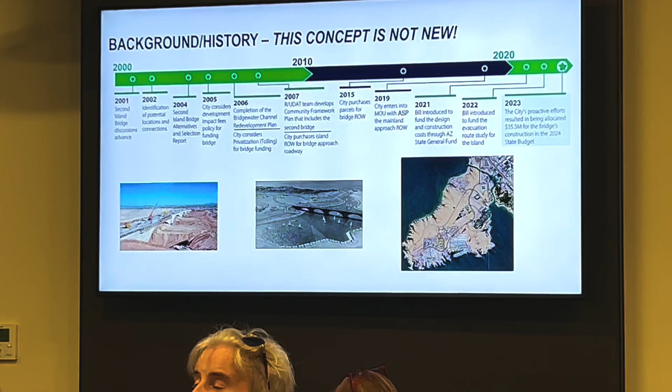The first notch on the timeline says 2001, but I can only squeeze so much on the slide. Actually, the early discussions, as many of you know, go back to the 90s, but really started to get some traction in the early 2000s.

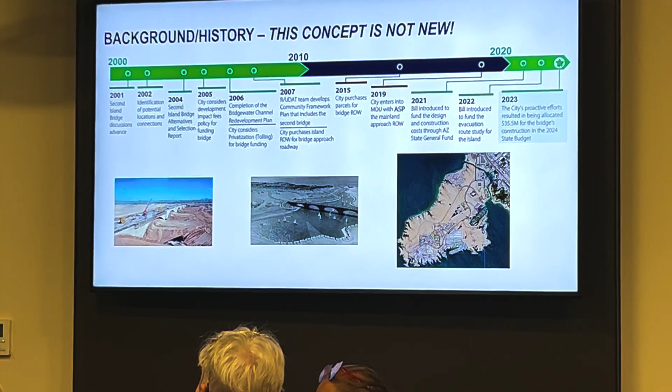There's an actual report or study that was done in 2004. There was a redevelopment plan of Bridgewater Channel in '06. In 2007, the city was very fortuitous and seized an opportunity to collaborate with the Arizona State Land Department to purchase right-of-way on the island side with and through the State Land Department, who manages a large portion of the lands on the island, as I'm sure many of you know.

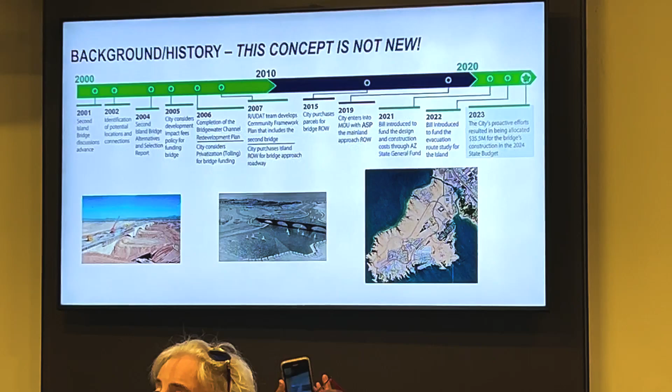And then in 2015, the city purchased some parcels on the mainland side, if you will, immediately adjacent to the Lake Havasu State Park for the would-be connection, and you'll see here momentarily that the preferred roadway alternative utilizes that very right-of-way that was purchased by the city. And then in 2019, there was an MOU, memorandum of understanding, entered into between the city of Lake Havasu and the Arizona State Parks Department for the reservation of potential right-of-way for a future road, which we are now here to bring to fruition.

And then maybe most importantly, Representative Biasiucci led with his colleagues at the state legislature the appropriation of state budget monies for the funding of this project. So you all are very lucky that, unlike a lot of projects, the money is in the bank, to the tune of $35.5 million, okay? We'll talk about that budget. And through that appropriation, the process has commenced. This is kind of the first leg of the journey, as Tony suggested.

This is called a feasibility study at a planning level to evaluate appropriate roadway alignments and bridge alternatives. And the culmination of that feasibility study is this evening, with sharing those results, ranking those alternatives, and recommendation of the preferred alternative for your feedback. Those of you who have been along for the journey, this will look familiar to you. Those who haven't, just a quick little synopsis.

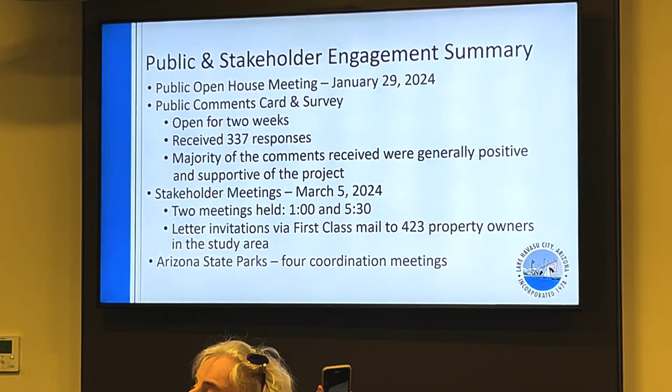There's been a tremendous amount of public input and dialogue. It began with the first public open house meeting on January 29th over at the Aquatic Center, and had a comment card and a survey done online. Tremendous feedback, which we very much appreciate. Like I said, the study in many respects is only as good as the feedback that you give us to help guide us along the way to balance the technical aspects of the study. 337 responses received, which is tremendous, quite frankly, for a community this size. The majority of the comments we received are generally positive and supportive of the project.

We did have 2 stakeholder meetings on March 5th, and we are having a couple more of those tomorrow. 423 property owners who live in the vicinity of this corridor received notification by first-class mail. We held those first meetings on March 5th, and we're going to hold the second round tomorrow in this very room. Last but certainly not least has been our close coordination and collaboration with the Arizona State Parks Department, a very instrumental part of this process. We've had 4 coordination meetings with Mr. Roddy and his staff. We can talk more about that in a little bit if you like.

Real briefly, Tony mentioned Kittelson Associates, along with our traffic engineers. When you undertake a project like this, you want to do traffic modeling to understand what the roadway capacity, i.e. the size of the roadway, needs to be to accommodate growth in the area, but also underscore that this project is rooted in the fact that it's an evacuation route. That is a key point to underscore, but in doing so, you want to make sure the roadways are properly sized. The analysis compared today's traffic versus tomorrow's traffic, simply put, in 2045. A typical planning horizon like this is 20 years.

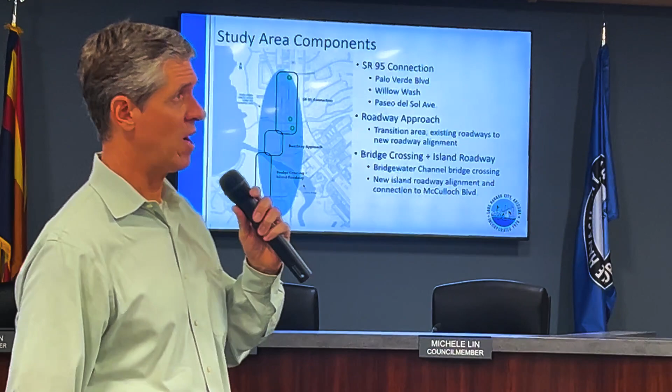This slide will look familiar, and it's not to be redundant, it's just for those who've been along for the ride, to remind you that on January 29th we talked about how we were going to look at this study in basically three components. There was the north component, or a connection potentially to State Route 95, and we evaluated those potential connection points at Palo Verde Boulevard, the Willow Wash alignment, and Paseo del Sol Avenue.

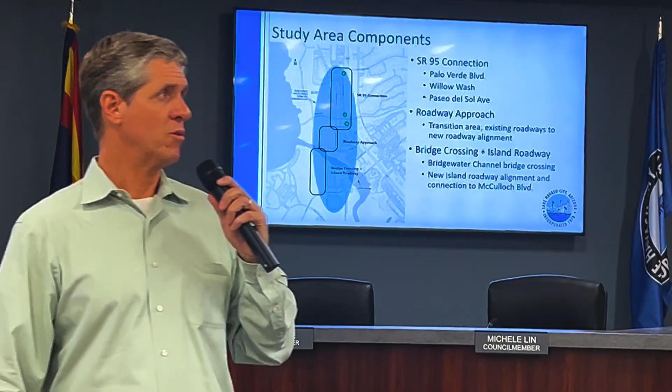The second or middle portion is that roadway approach, or the transition area from London Bridge Road to a brand new road, and the transition that will occur, as you'll see here in just a minute. And then we talked to the bridge crossing and the roadway on the island itself. So from a geographic segment standpoint, we looked at this study in those three different components.

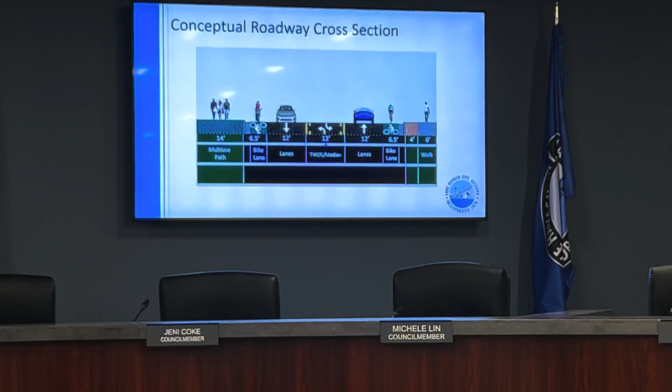Real briefly, if anyone was not at the council meeting on May 14th, this is new information to you. This is the proposed roadway cross section, okay? In just a couple slides, we're gonna look at these roadway alternatives from a bird's eye view, an aerial shot. So I want to orientate you to look at the roadway before we look at the aerial view.

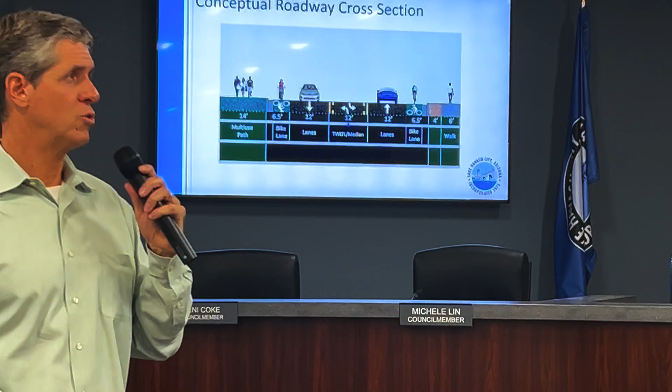This is what the roadway we're proposing would include, and it's a multimodal facility to have, as I mentioned, the two travel lanes and the two-way left turn lane, or median in the middle. That can also be used for emergency purposes, by the way. Two bike lanes on each side, okay? And then on the west side of the roadway, and west is left in this graphic, a 14-foot plus or minus multi-use path that can accommodate pedestrians and or bicycles.

And then on the east side of the roadway, or the right side of the graphic, would be a 4-foot separation from the bike lane with landscaping or other materials, and then a 6-foot sidewalk, okay? So we have all modes of travel accommodated in the prism of the roadway. Altogether, that's about 73 feet plus or minus, with some subtle variations to be determined in the final engineering design, which will be the next stage of the process.

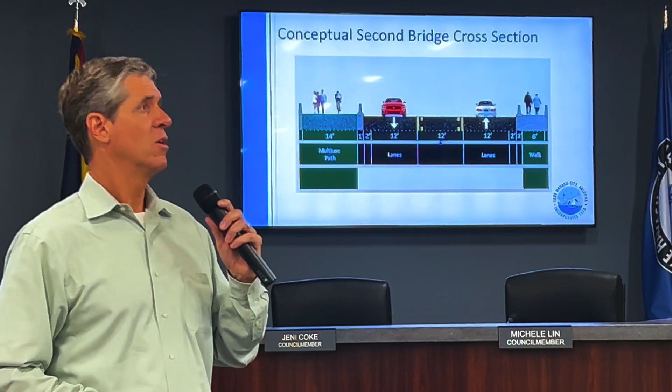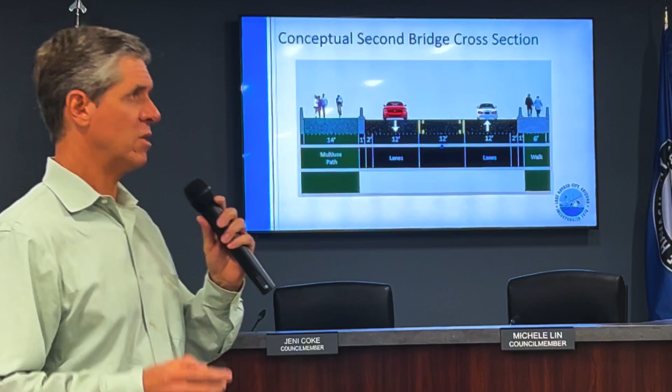So, to orientate you for the bridge itself, a cross-section of the bridge. Basically it captures all the same multimodal features, but kind of necks down like many bridges do, right? The bike lanes are not on the bridge pavement section itself. The bikes are shifted to the multi-use path, but we have two 12-foot travel lanes, the center turn lane and or emergency use purposes, 6-foot sidewalk on the east, and the 14-foot multi-use path on the west.

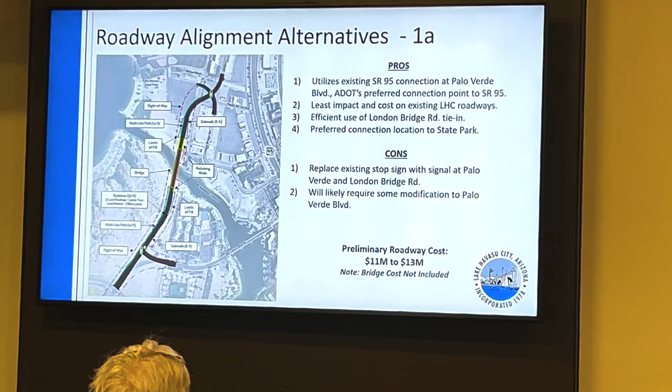So, with that, I'm going to transition to the roadway alternatives themselves. There's a lot on these graphics, and what I want to point out first is to orient you with the line work that is shown. This council chambers has so many TVs, it's wonderful in here, but from wherever your vantage point, I want to orientate you because these lines up and down the roadway are replicated on each of the alternatives, okay?

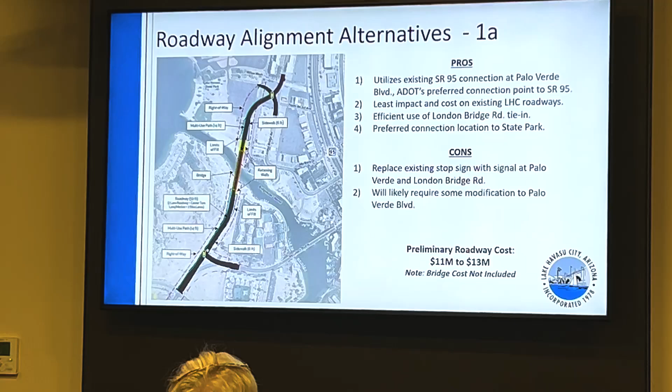What I want to point out is that the dashed magenta or purple-ish line is a right-of-way reservation area. I talked about the right-of-way on the island and the MOU with state parks. That's a 200-foot swath of property, okay? And so that's the extent of the right-of-way reservation area.

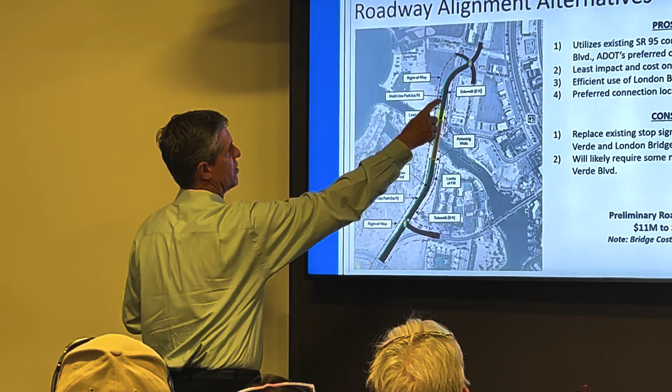Anytime you see bold yellow lines, those will be retaining walls, along with the thinner blue lines that are called out as limits of fill. Those are the areas, if you can envision, where the roadway before and after the approach will be at existing grade, then the roadway is going to start to elevate, okay?

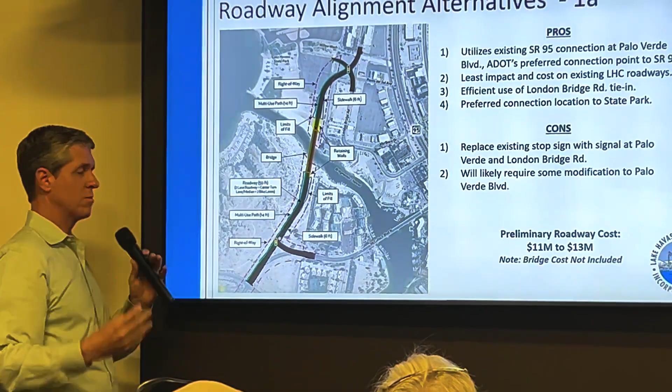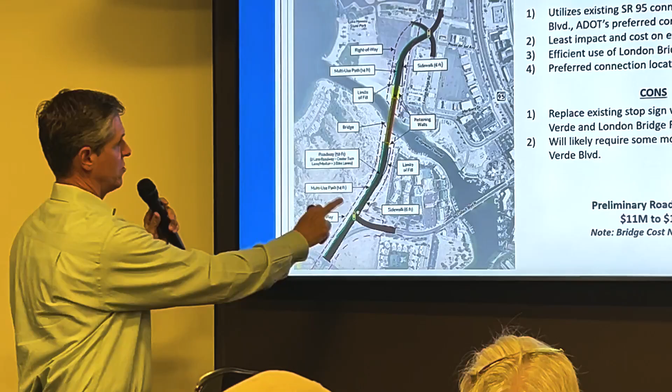So that area where you see limits of fill is fill dirt to begin to elevate the elevation of the road to then get to the level of the bridge that needs to clear the channel, okay? So the retaining walls are there to help maintain or hold, for lack of a better term, the dirt in the elevated condition. The bridge section itself is in the orange line work, and then the multi-use path that you saw in that cross section is in the bold green. And then you'll see the traffic signal icons accordingly.

So we have a series of 5 roadway alternatives, and within each alternative, there's an A and a B. Okay, the A alternative is always the alternative that has traditional signalized intersections. And then when we get to the B alternative, I'll just go back and forth. The B of the same version, 1B, has a roundabout alternative as opposed to a traditional signalized intersection.

Okay? So, real briefly, because I'm going to kind of go through these quickly on the roadway alternatives, and then my colleague who's joining us virtually, John Emmenheiser, is going to go through the bridge slides, and then I'm going to come back and dial in on the preferred alternative, okay? But I want to walk you through these alternatives briefly.

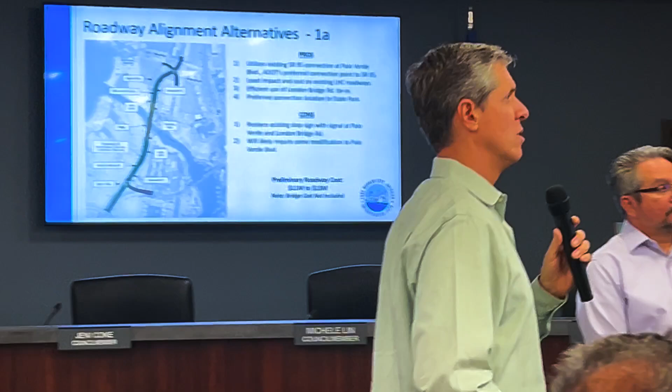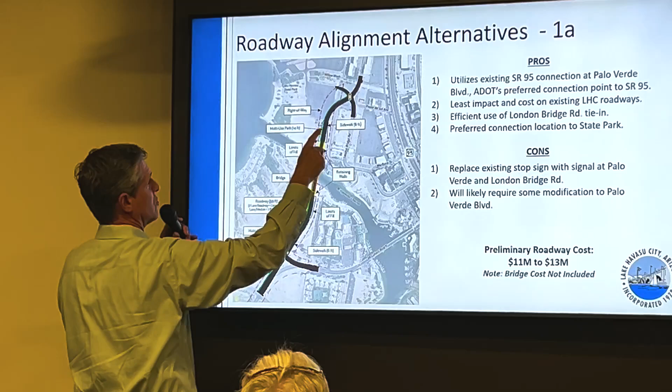1A, as you can see, you can see some of the pros and cons there, but this ties in right into London Bridge Road. And on this graphic, in case you're having a difficult time orientating yourself, London Bridge Road is right here. Okay, so the roadway will come in and then transition through the city-owned, it's that parking lot, which is city-owned property.

The transition onto State Parks property, where the existing MOU contemplates this roadway for many years now, and is shown in that, again, that 200-foot swath. You can see how the roadway is a portion of that 200-foot swath. Comes straight down, crosses the channel in this fashion, and it connects to the existing right-of-way that's already in place, okay, on the island side.

So from generating alternatives and looking at different alternatives, I want to really underscore the fact that there's existing right-of-way in place on the island, and there's an MOU, Memorandum of Understanding, for the reservation of right-of-way through the state park. So those are variables that exist today that we as the design and planning team are known variables that we are staying within, okay? And that was a primary objective of all the partners as we move forward, so I wanted to underscore that.

With this particular alternative, I'm spending a little more time on this one than the others to acquaint you. The others will be a little faster, but this utilizes a connection at Palo Verde Boulevard, which is, of course, to the north, which is, by the way, ADOT's preferred connection point to State Route 95. So, as you can imagine, connecting a new roadway to an ADOT-owned and operated facility is going to require coordination and approval from ADOT. Formal approvals will be done in the upcoming engineering design stage, but of course we've had preliminary discussions to get their feedback. Okay, so ADOT's preferred location is at Palo Verde.

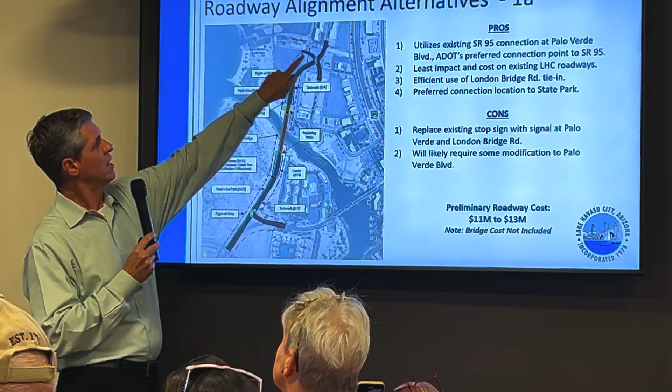They had identified that they would prefer to have a connection point, and it will be a full-time permanent, I want to say year-round, Dan, I'm sorry if I misspoke on that, but a full-time access, or at least the potential thereof, at the north end, as this is demonstrated here, the north end of their existing edge of the parking lot, okay? So that's another important project partner variable that's been factored into the design. So this particular alternative achieves that objective as well.

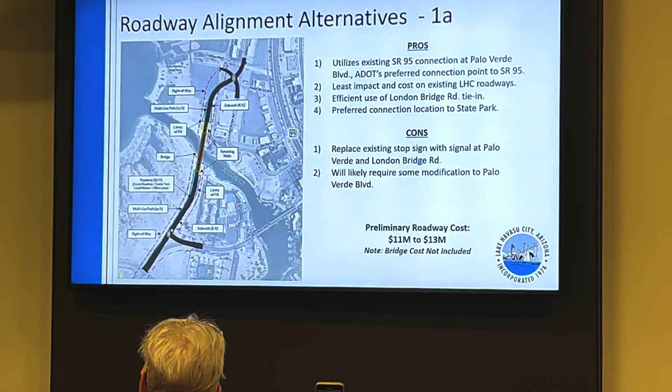A couple cons associated with it is to replace the stop sign at Palo Verde and London Bridge Road with a signal, and then it will require some subtle modification to Palo Verde Boulevard as well. Last but not least, you see in the lower portion of the slide, we show a lot of costs associated with each alternative. The preliminary cost estimate on this roadway, again, does not include the bridge, is at $11 to $13 million for this particular segment. Okay. So now I'm going to kind of move through these a little bit faster because I did some orientation with the line work and everything else.

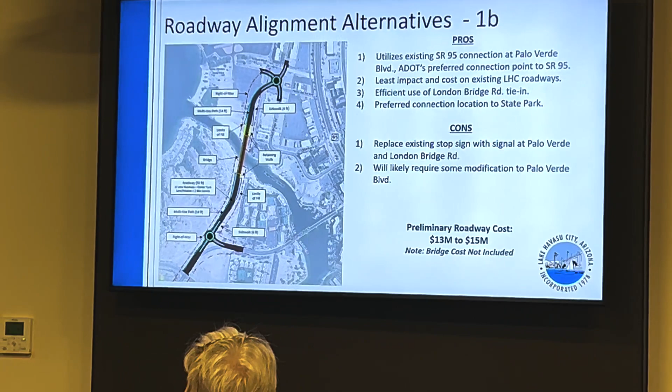So 1B, same exact option or alternative as 1A, except with the roundabout options. The only difference you can see is in the cost estimate. Roundabouts cost a little more on the front end to design and construct. However, they're cheaper to own and maintain in the long term. So a little bit more cost on the 1B version of 1.

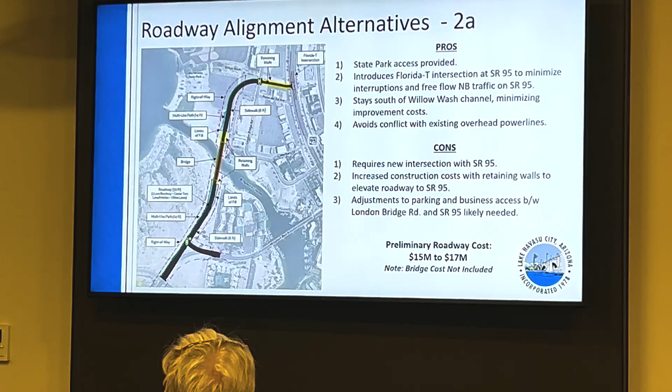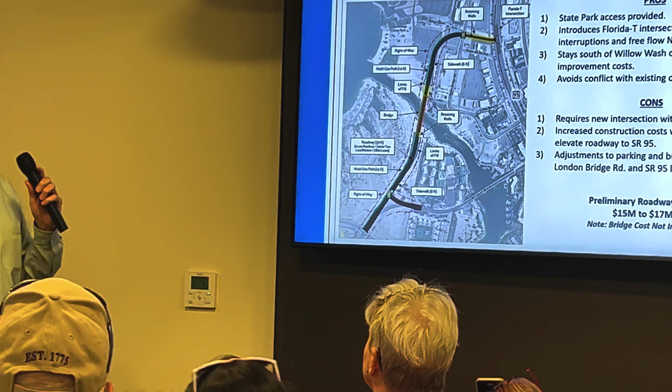So quickly on alternative number 2, 2A, the roadway has a lot of the same characteristics as 1A and 1B, and you'll see, folks, throughout these options that particularly on the island side, a lot's not going to change. That right-of-way is in place, those known variables are there. The only thing that changes with 2A is how this particular alternative turns at a 90-degree angle as it leaves the state park. It goes due west, if you will, east, on the south side, straddling the south end of Willow Wash with a proposed connection point with State Route 95.

So remember we talked about the yellow, meaning the retaining walls? You can see a lot of yellow there, which translates to more dollar signs for retaining walls to raise the roadway, cross Veterans Way, and connect with State Route 95. So that's how that option's a little bit different. Certainly, it provides access to the state park, but not at its preferred location.

It connects to State Route 95. It minimizes improvement costs or utility conflicts along the south side of Willow Wash. However, it does disrupt business access on Veterans Way. So that's one of the Achilles heels, if you will, or negatives of this particular alternative.

Hey Kevin, can I ask a question? Can you, I'm going to go through this and then I'll take questions if you can.

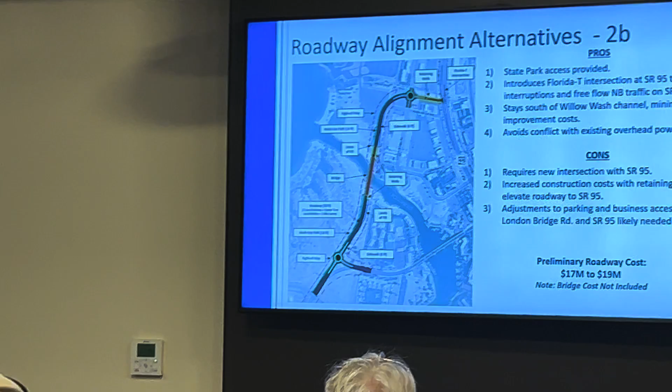Thank you, sir. 2B, again, same exact alternative. We're just replacing the signal at London Bridge, the proposed intersection of London Bridge Road and this new road, and then down on the island at the McCulloch intersection. So 2 roundabouts instead of 2 signals. Pretty much everything else is the same.

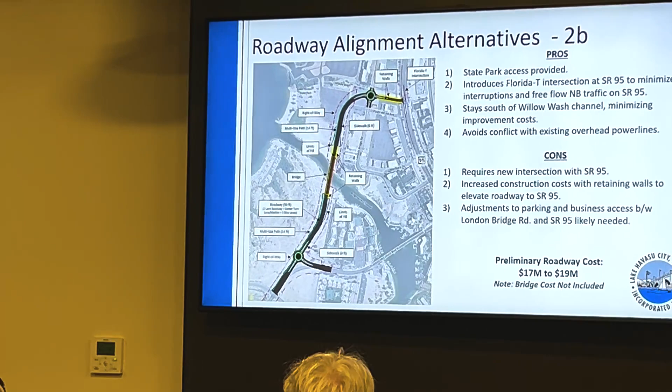You can see the cost went up. I was remiss in not pointing out on 2A, 15 to 17 million for this roadway. With the roundabouts, 17 to 19 million. So just a scooch more expensive than alternative number 1.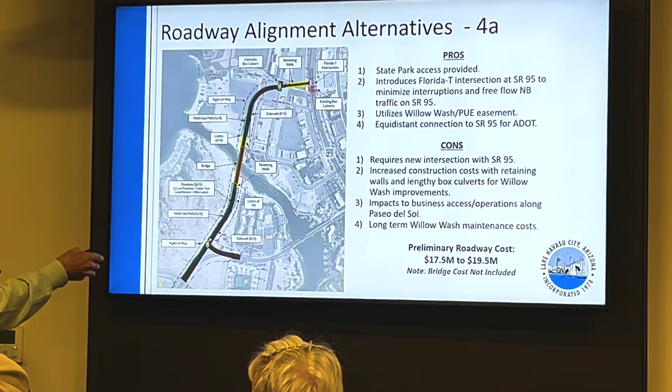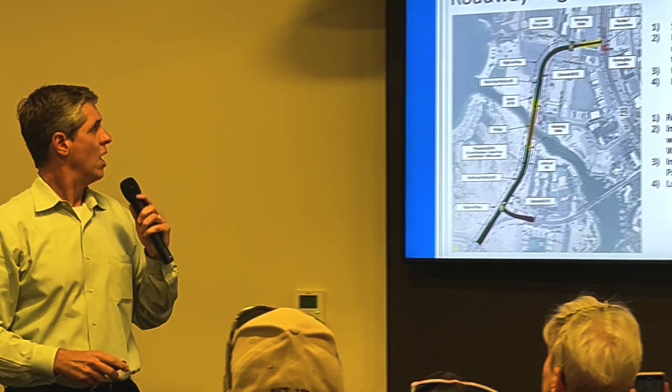4A, so again, you can see it replicating a lot of the same roadway characteristics, same exact ones on the island. The bridges, in terms of the alignment, is the same. As we begin to leave the state park right-of-way reservation areas, you can see the roadway traverses at an angle, and it crosses over Willow Wash.

If you're jumping ahead and you can see the cost estimate, you'll see that this is an expensive proposition on this alternative, and that is because it's crossing the wash, and there's those yellow lines indicating expensive retaining walls that are more structurally reinforced to accommodate the utilities and the wash itself.

You might ask yourself, well, why do we even contemplate that? The reason is that particular location at State Route 95 meets the minimum ADOT spacing requirements between intersections of Palo Verde and Mesquite. So this is one of the few alternatives that ADOT would even take a look at conceptually, and meets their minimum specifications. And the reason for that, you'll see here, the next slide.

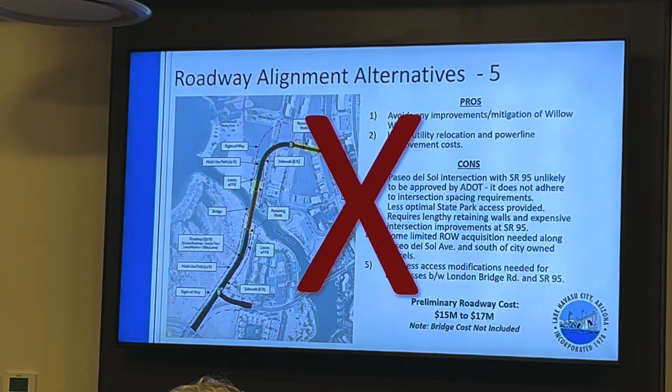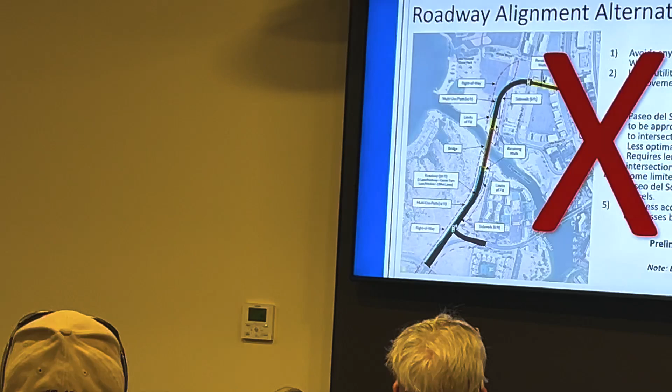Alternative number 5 - this one we told the public we'd be looking at, and we did, on January 29th. This option was along the Palo Verde, Paseo del Sol alignment. But it was eliminated because any contemplation of connecting to State Route 95 at Paseo del Sol is a non-starter - it does not meet minimum spacing requirements. This one would be too close to Mesquite. So while it's favorable on the cost side, if it's not going to be approved by ADOT, there's no reason to consider it moving forward. That comes through the discourse of the alternative analysis, and those discussions have occurred.

So with that, that's the roadway alternatives. I'm going to turn it over to John, who's with us virtually. Hopefully we'll be able to hear him appropriately. John is the bridge engineer that Tony introduced. He's joining us virtually, and he's going to walk us through 7 different bridge type alternatives. John? Thanks, Kevin, can you hear me all right? We can, John, thank you. All right, very good, so let's go through the 7 bridge alternatives.

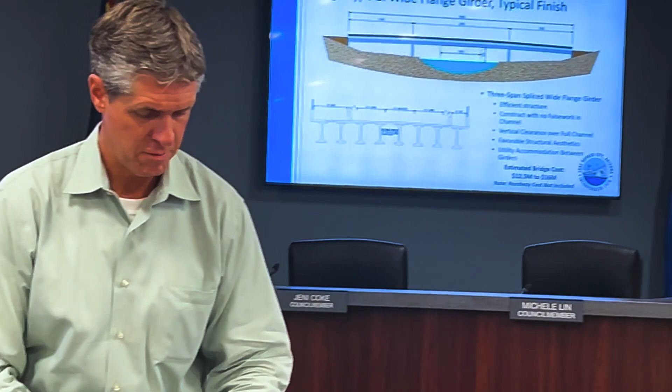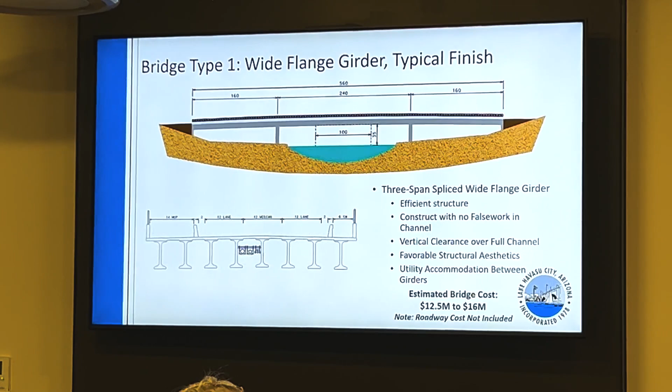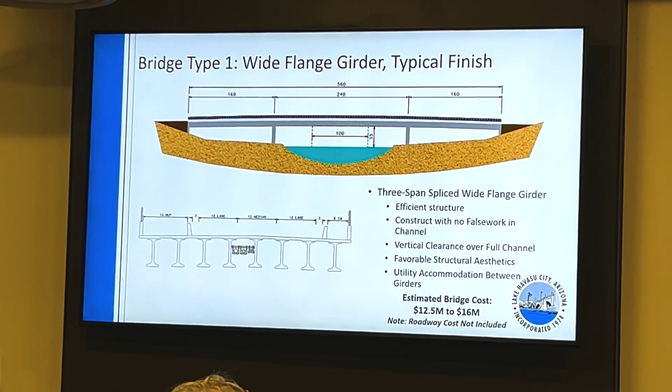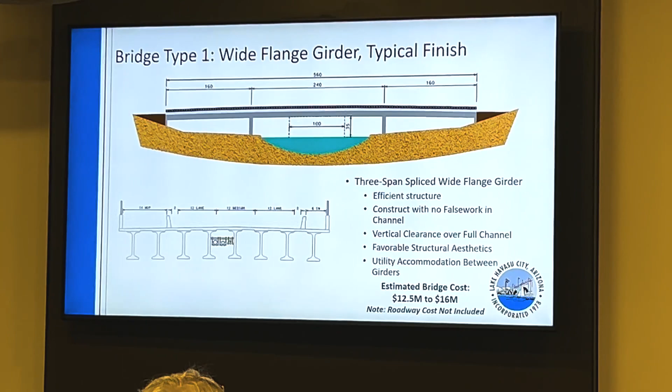We looked at 7 alternatives. They're all concrete bridges, all 3-span bridges with similar span lengths - 160 feet, 240 feet, 160 feet, for a total of 560. The first 5 alternatives are identical for span length. The differences, which we'll step through, are primarily the girder type, allowing for a more aesthetic or efficient structure, plus additional aesthetics to increase appearance. We've started with the most simple and cheapest structure, stepping through to slightly more complex. This is a typical configuration, similar to a highway crossing, with wide flange or I-shaped girders, a concrete bridge deck, and the road configuration on top. It's structurally efficient, with balanced spans in a 3-span arrangement. It's not a bad looking structure, but it's the most basic of the 7 alternatives. Future utility accommodation would be between the girders, exposed from below - we couldn't hide them, but could make them as discreet as possible. The estimated bridge cost for this is about $12.5 to $16 million.

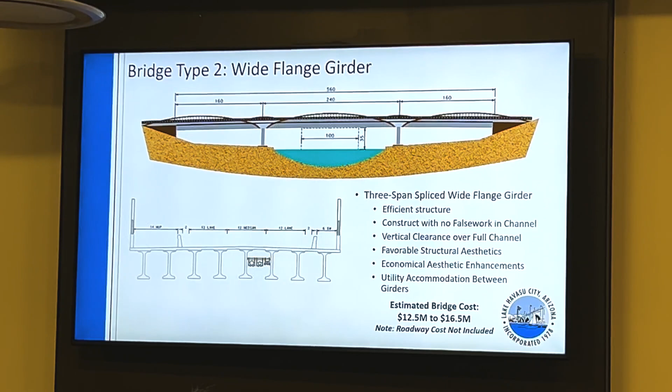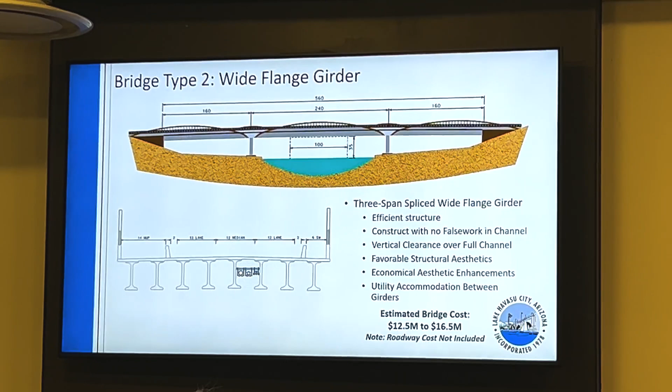Moving into type 2 - again, looks very similar, with the I-type or wide flange girders and utilities between the girders. What we did here was add a little bit of additional aesthetics. Rather than just a baseline coating, we could do architectural railing and some additional colored coatings on the fascias of the girders, to make it a little more aesthetic for users below and on the bridge. The estimated bridge cost only increased slightly, about $500,000 with rounding, so between $12.5 and $16.5 million.

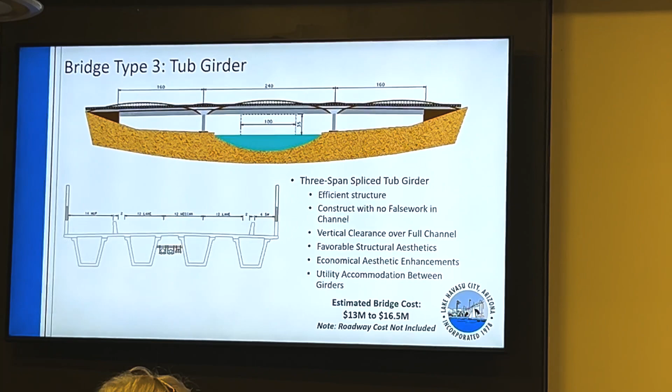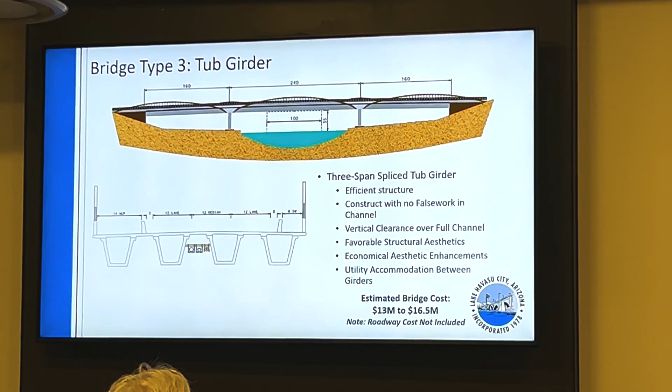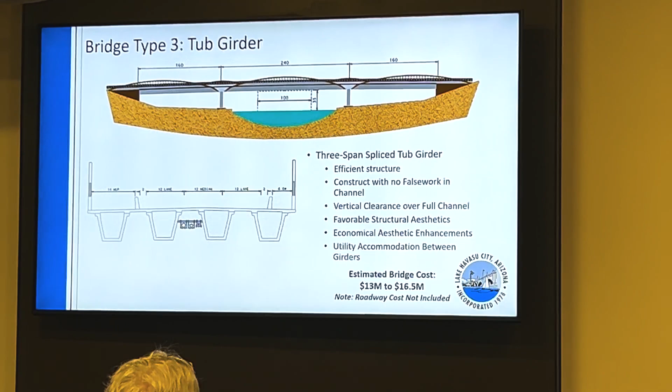Moving into the third type - here we introduce a tub girder. For this span length, the tub girder wouldn't necessarily be structurally required, though it does have a bit more capacity than the I-type girder. The biggest difference is the aesthetics of the structure itself - rather than seeing the I-type from the side and below, we just see 4 girders with smooth soffits and fascias, bottoms and sides, giving a smoother appearance. We also included aesthetics on the bridge railing and some bridge coatings. Another thing with the first 5 options is the ability to have vertical clearance over the full channel - we show this as 100-foot width, but it extends the whole way across the water from pier to pier. The estimated bridge cost for switching to tub girders goes up just slightly, to about $13 million to $16.5 million.

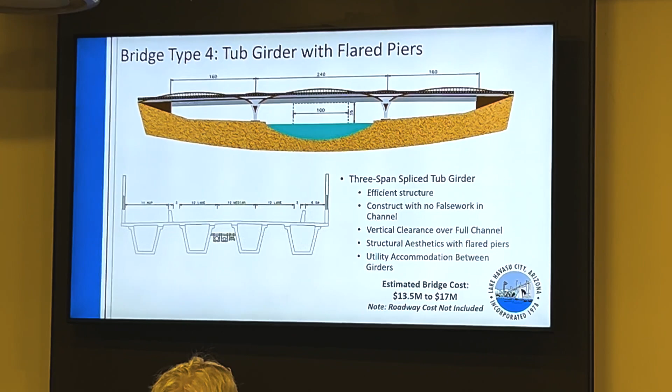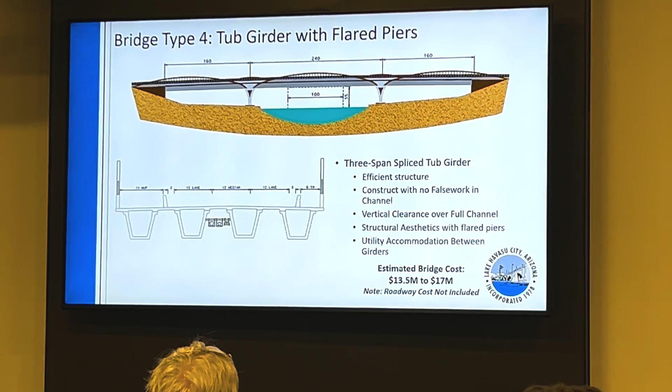Moving into type 4, there's really just one component change here - we've added a flared pier. Since we've used an arched aesthetic railing on the fascia and side of the bridge, to start initiating that shape and provide more aesthetics from below, we've introduced a flared pier with some colored recessed architectural decorations on the pier itself. All the other components are the same - utilities still, for the most part, go between the girders, and we still have that full vertical clearance over the channel.

And we have a balanced 3-span, fairly efficient structure. Again, a slight cost increase of about $500,000, up to about 13.5 to 17 million.

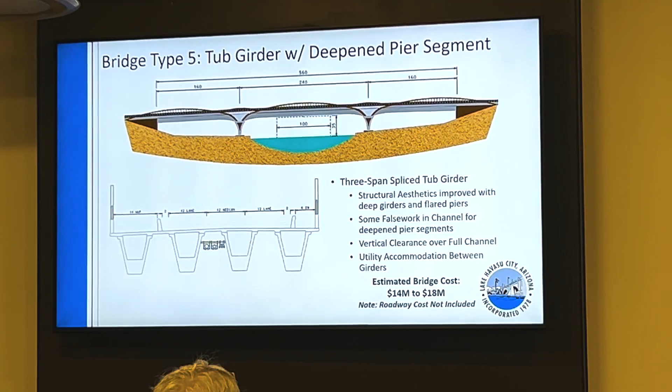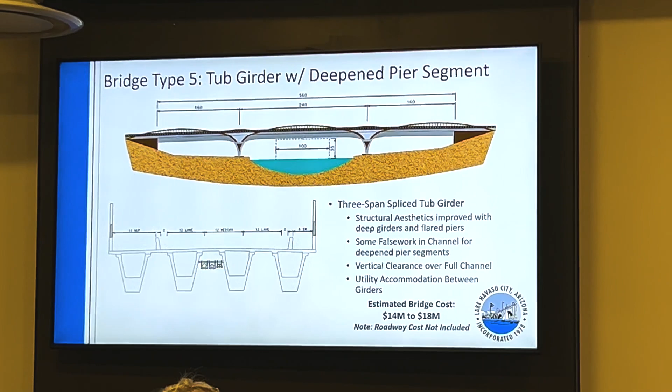Moving into the 5th alternative, and this is the last of the 3-span beam type bridges. What we did here was, in addition to flaring the piers, we also deepened the girder over the pier, so you can see we come off the pier and start to introduce that arch shape just a little bit in the girder itself.

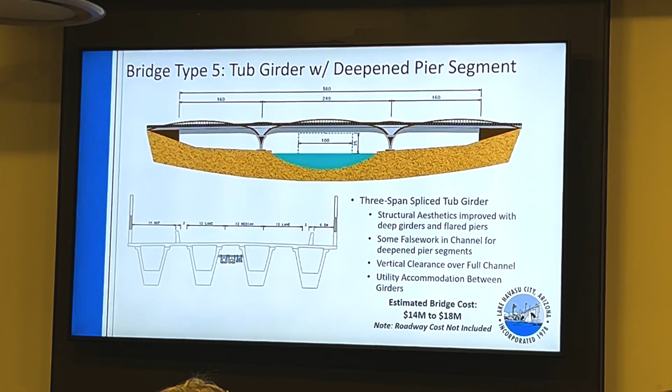A couple new complications with this. Because of that girder shape, we would have to have some temporary supports in the edge of the channel while we build this. We'd still be able to keep that open for navigation, but we'd have to coordinate that a little bit more, whereas the others could all be constructed without really any impact to the water at all, by suspending that center girder section in. Most of the other parameters are very similar to what we've seen before.

Estimated bridge cost, again, a more slight increase, about 14 million to 18 million.

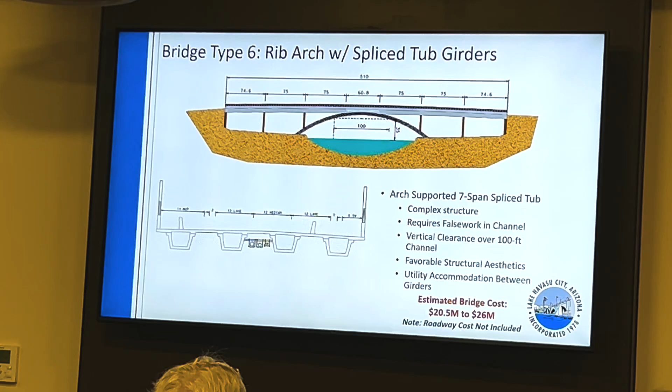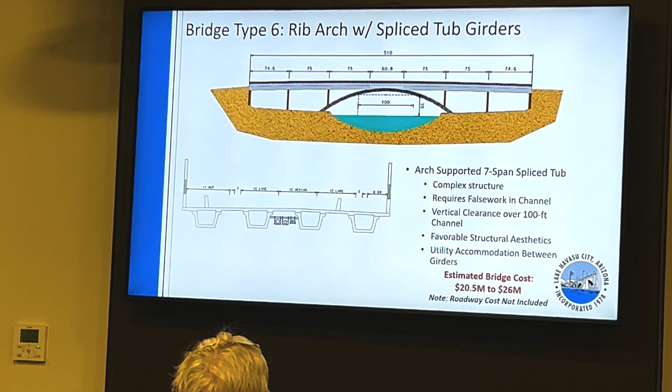Now moving into the last two types, this is where we took a look at the arch type structure. So this is a concrete arch that spans the channel, and then some short, called spandrel columns, just to support the girders coming off the arch between the ends of the bridge. The total length of the bridge here is slightly shorter, but for all intents and purposes, it's a similar structure type. To keep the top of the structure shallower, we've used shorter spans, with the exception of the long main span over the main channel.

A lot of the other components, again, are similar. We would hang the utilities between the girders. We do have some constricted vertical clearance because of the arch. As you can see, we really provide 100 feet, but not a lot more.

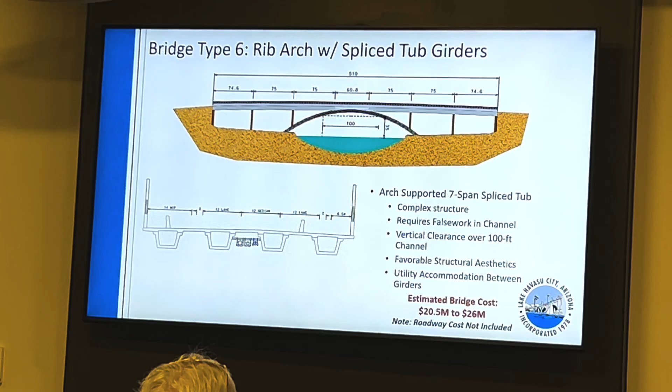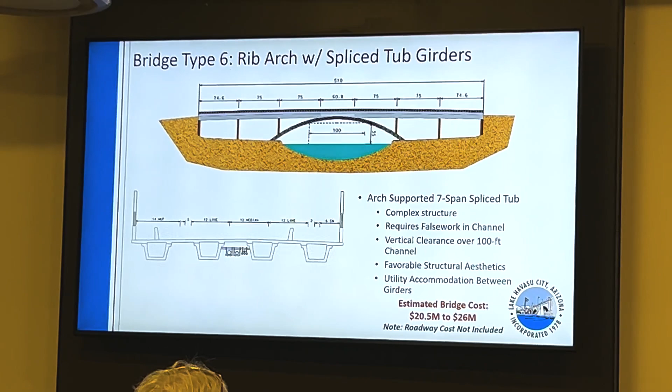And it's a complex structure that would require significant falsework or temporary supports in the channel during construction. Also notable here is the bridge cost increased significantly. The arch is a more complex structure to design and construct, as well as inspect and maintain, and that estimated bridge cost would be about $20.5 to $26 million.

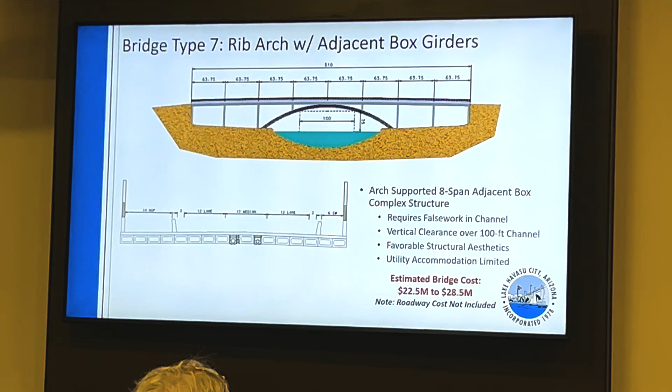And then for the seventh type, our last type, it's a variation on option 6 that we looked at, just with an even slightly narrower and thinner ribbon type top portion, superstructure of the bridge itself. So we've used these adjacent box girders. That also provides a clean look from below—we can see a smooth, almost ceiling-like surface rather than seeing the bridge girders.

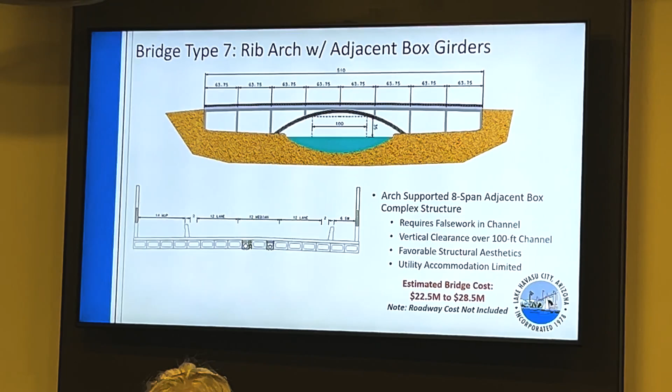And again, it requires the temporary supports from the channel, only provides that 100-foot width, and has a significant cost increase compared to the other options. So that was the brief overview of the 7 bridge options we looked at. I'll give it back to Kevin now to talk about the preferred alternative.

Thank you, John, appreciate that. So here's where it all kind of culminates, right—the evaluation of the different roadway alternatives, the bridge alternatives, bridge type alternatives. So the project team applied a 2-tiered process to select the preferred alternative.

The first tier was really a budget affordability screening. We'll show it in the next slide, this matrix, but the one thing I really wanted to underscore is that the primary objective of this study by the city and our project partners was to stay within the budget. We're fortunate enough to have that budget. We don't want to go looking for other money.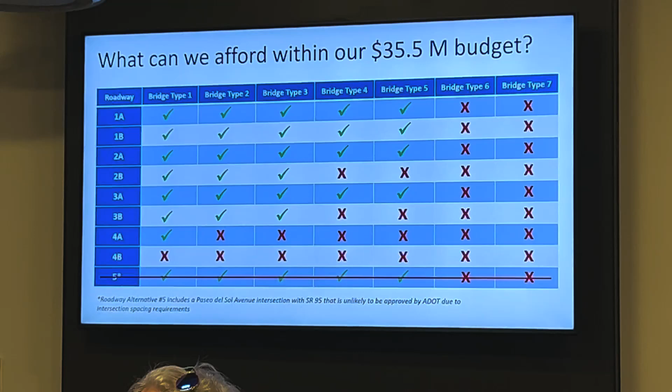You can see bridge type 6 and bridge type 7 with a lot of X's. Those bridges, while they might be the most visually appealing, are complicated and too expensive to afford the roadway along with the bridge. Roadway alternative 5 at the bottom, shown with the red line through it, we identified as the non-starter because it's highly unlikely to be approved at that connection point by ADOT. This begins to tell a story of the combination of roadway and bridge alternatives that can meet that affordability index, shown by the green check marks.

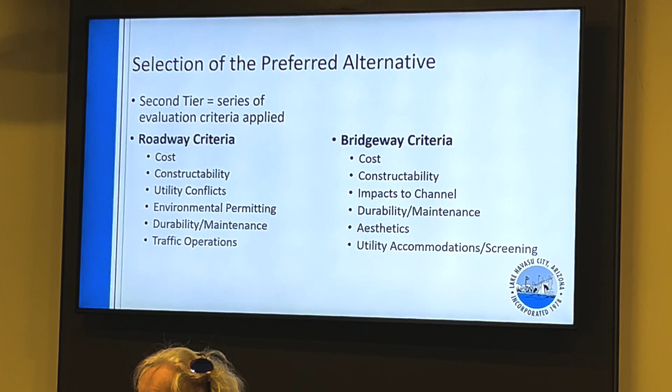We applied a second series of criteria, some with parallels and overlap, since this is ultimately a construction project. For the roadway, we applied cost, constructability, utility conflicts, environmental permitting, durability and maintenance, and traffic operations. For the bridge, similar criteria including cost and constructability, impacts to Bridgewater Channel, durability and maintenance, aesthetic qualities of the bridge type, and utility accommodations or screening within the aesthetic of the bridge. Those were the categories applied.

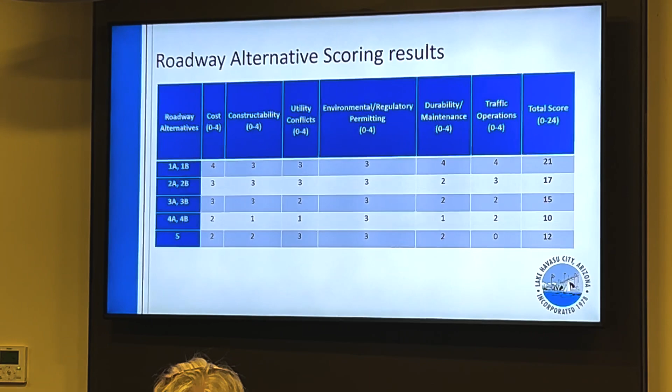As the project team evaluated and put the second tier screening together, this is how the numbers came out. On the left side of the table are the different roadway alternatives we reviewed with you this evening. On the top is all the criteria we just talked about, and each was ranked by a score of 0 to 4 for each category, for a total potential score of 24. Roadway alternative 1A and 1B ranked the highest, scoring best in cost, durability, and traffic operations in particular.

This particular alternative has the least impact to existing Lake Havasu roadways and ties in pretty seamlessly. It has the least utility conflicts, etc. So it received the highest score, with alternative 2A and 2B coming in second highest.

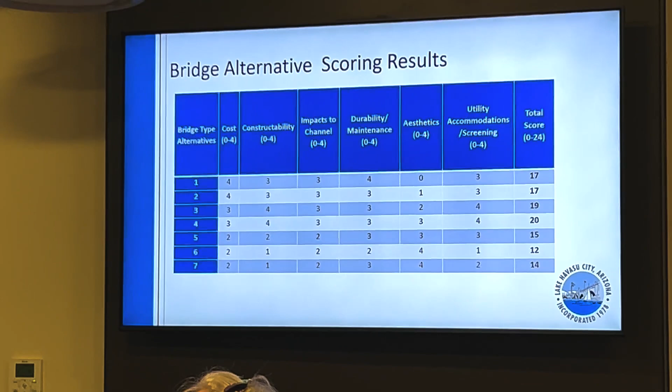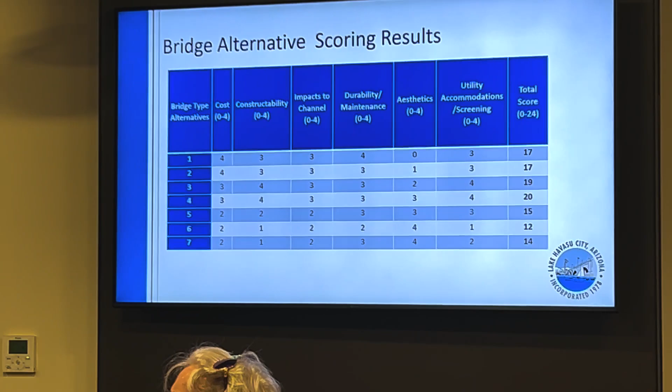So how about the bridges John just presented? How did they do? In the scoring of the bridges, there's a bit more compression, partly because there are seven alternatives. As John articulated, there's a lot of parallel in the structural design, with similar concepts prevalent throughout each alternative. They have different aesthetic qualities and some different structural features, but based on the scores, bridge alternative number 4 ranked the highest, particularly on the utility screening side and the cost and constructability side.

Circling back to our mission number one, which was to keep both the bridge and the roadway within that $35 million budget.

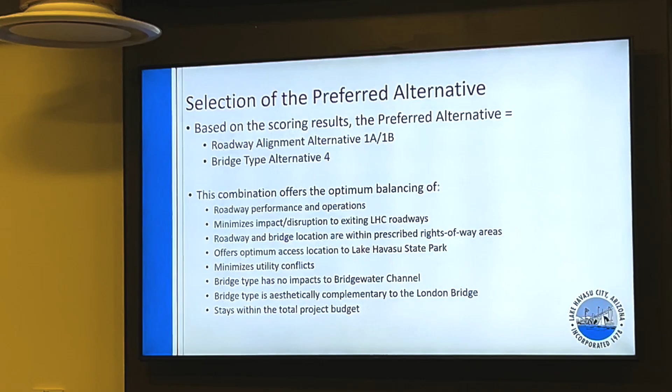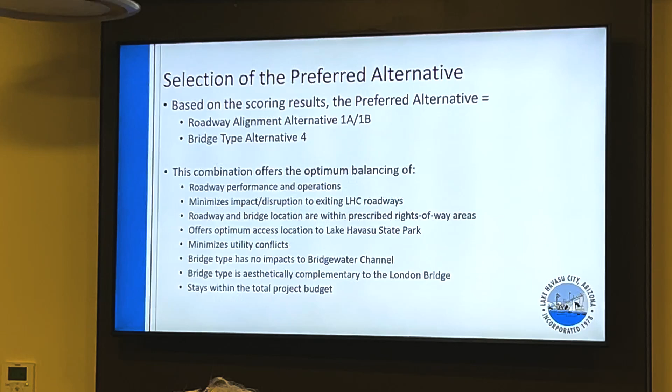The combination, the preferred alternative we are suggesting to the community and will be presenting to City Council, is roadway alternative 1A and 1B combined, along with bridge alternative number 4 that John presented. We think this combination provides the optimum balancing of roadway performance and operations, minimizes impact and disruption to Lake Havasu City roadways, and stays within the prescribed rights-of-way. It provides optimum access to Lake Havasu State Park, minimizes utility conflicts, and has no impacts to Bridgewater Channel, which is important from a bridge structure and constructability standpoint. The bridge type is aesthetically complementary but not overshadowing to the London Bridge, and it stays within the overall project budget.

So just wanted to reinforce that again, a good thing, so you've seen it. I don't want to be redundant, we're getting a little long in the presentation. So the only thing I wanted to point out is what we're recommending is alternative 1A with a combination of 1B.

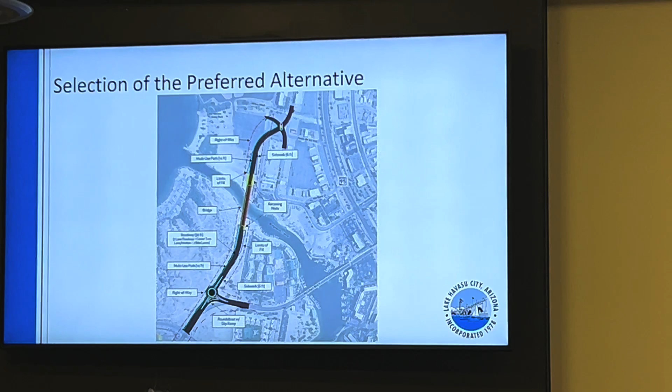I want to point out to those who've been along for the process, I made the comment at City Council that we don't normally advocate for either signalization or roundabout. That's usually a community preference. So I'm eating crow a little bit, because it became very compelling to Tony and Russ, and particularly the engineering design team, that a roundabout really works well operationally on the island. I know we have different thoughts about a roundabout, but we slightly adjusted it to add what's called a slip ramp, which allows operations to move more freely and efficiently, and they're safer. The geometrics of the alignment of the right-of-way, combined with the skew of the existing McCulloch Boulevard, mean a roundabout really works well at that particular location.

Will it ultimately be a roundabout? We're hoping so, but this will be determined in final design. I know some of you will love a roundabout and some of you are cringing - I've been there and done that. We're merely suggesting, from a professional standpoint, that traffic operations based on the geometrics of the existing road, combined with the skew of the right-of-way, mean a roundabout will function better at this location, in our humble opinion.

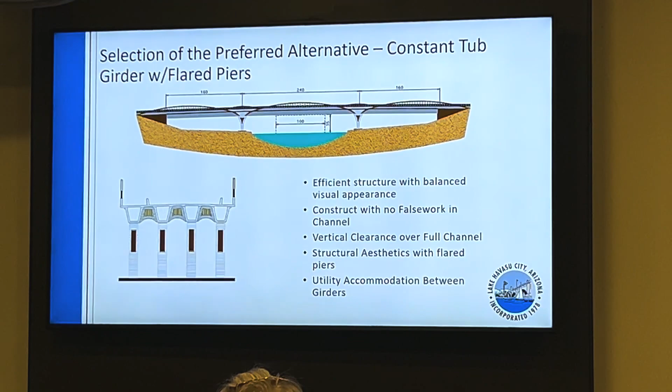Reiterating on the bridge, just to keep it fresh in your mind - as John articulated, it's an efficient structure with, we think, a nice balanced appearance with the flared piers, as you can see, and no impact to the channel, and it fits within the budget, among other things. So I won't belabor the point. Last but not least, a high-level summation of the cost and features.

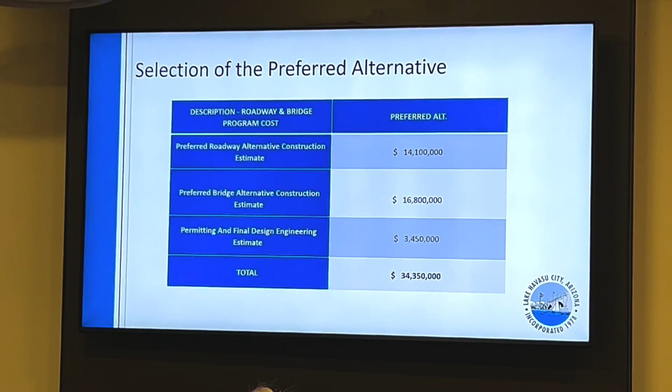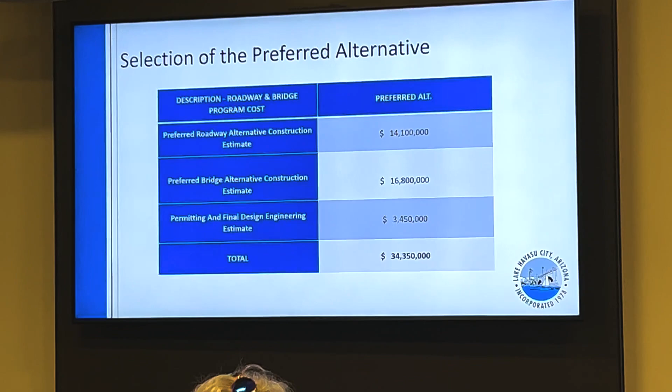We have large spreadsheets that articulate this in great detail, but to boil it down for public consumption, the preferred roadway alternative is just a little north of about 14 million. The bridge alternative is about 16.8. Then there's the process and next steps, which we'll articulate in the next slide - permitting, final design, the regulatory process, including a bridge permit with the feds to get over the channel, about $3.5 million, for a total budget at this preliminary stage of just over $34 million, within that $35.5 million.

I wanted to underscore one thing on the cost estimate, briefly. If you recall in the previous slides, there was a cost range. We applied the conservative or high side of those costs with respect to this overall cost estimate - that's professional judgment, to provide conservative estimates.

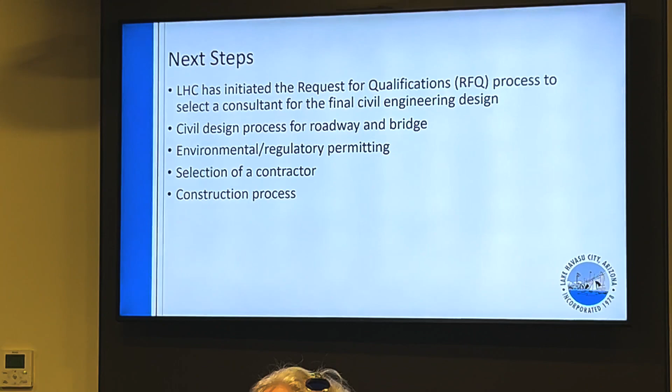Next steps, briefly - we talked about timeline a little, and we've had those questions at previous meetings. I've got to tip my hat to the city - they're moving forward right now with the RFQ, the request for qualifications, to select a civil engineer for the final design. As we're buttoning up this planning feasibility study, they are wasting no time, which is great, so they can get moving on construction of the bridge.

So there's civil design, engineering design for the roadway and bridge - those things don't happen overnight, of course. Along the way, there's environmental and regulatory permitting required to cross the channel, so the feds will be involved with some of that, done in conjunction with the engineering design process. Through that process, a contractor will be selected to actually construct it, and the construction process will commence. So things are moving forward with respect to the process.

I turned it off. Okay, it's over, thank you. Yeah Cindy, it's done, turn it back on. Technically challenged, obviously - you turned it off again. There we go, and then there we go. So, introductions - thank you.

It doesn't trust me, right? Not at all. I'm going to pause right there - I know there's going to be a few questions, so let me get my bearings on where we're at in terms of people in the room.